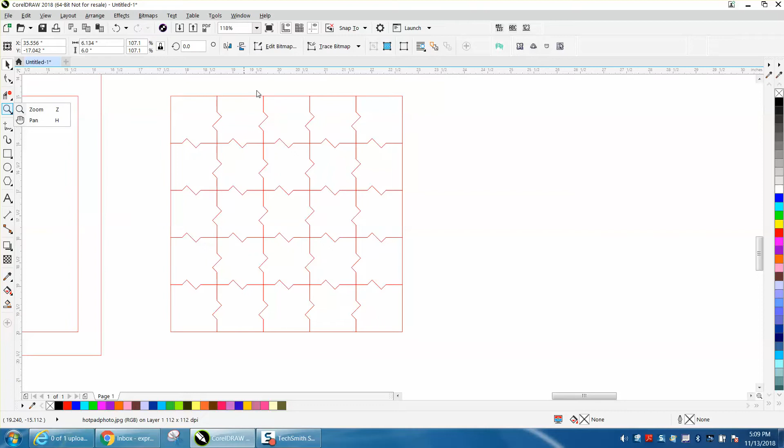Hi, it's me again with CorelDRAW Tips and Tricks, and this is part 2 of making this hot pad. I started thinking it would be really easy to take away the kerf. Whenever you cut anything, these two lines are going to cut out, and the pieces aren't going to fit in as tightly. I have a video on how to get rid of that, and with some glue, but it'd be nice to make the kerf even tighter.

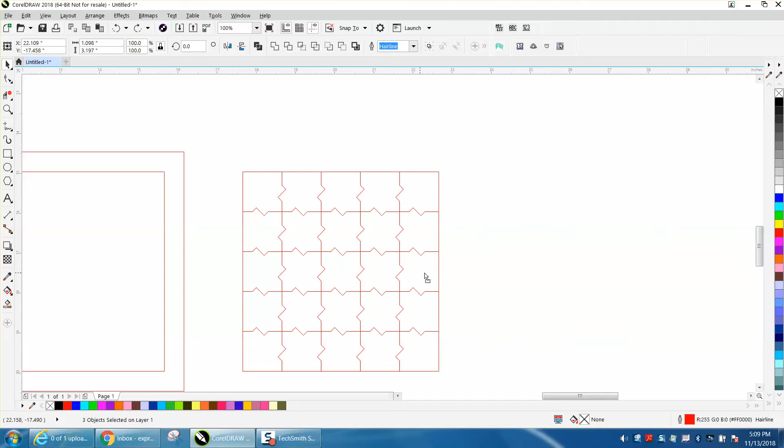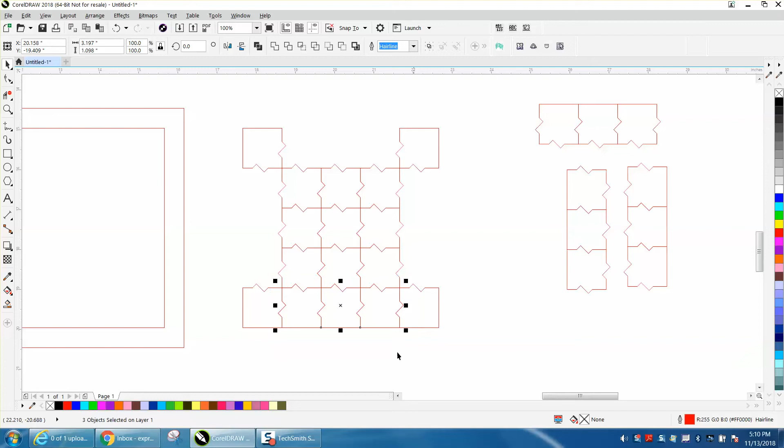And what is neat about this, let me back up here. A lot of these parts are identical. These three parts are identical. These three parts are identical. Matter of fact, I think they're identical. Let's flip them here. And they are a match set. No, they're not. They're a little different. Okay, so those three are the same. So you'd only have to run kerfs on those four, and just to play it safe, I would run the kerf on these four corners.

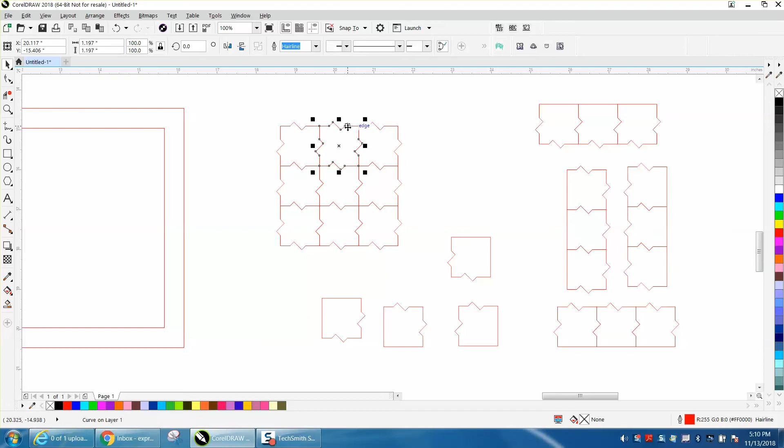And this takes just a little bit of time, and what I should have done, I should have made a copy of this so you'll know they'll fit together. These 9 are all the exact pieces. We proved that in the last video, and just to prove it again, move it over 1 inch. Whoop. Got my nudge factor set on 7. Move this over 1 inch and it fits right on top of that other one. So you would only have to do one of these because these are equal. You could do one of these, your 4 corners, and one of these.

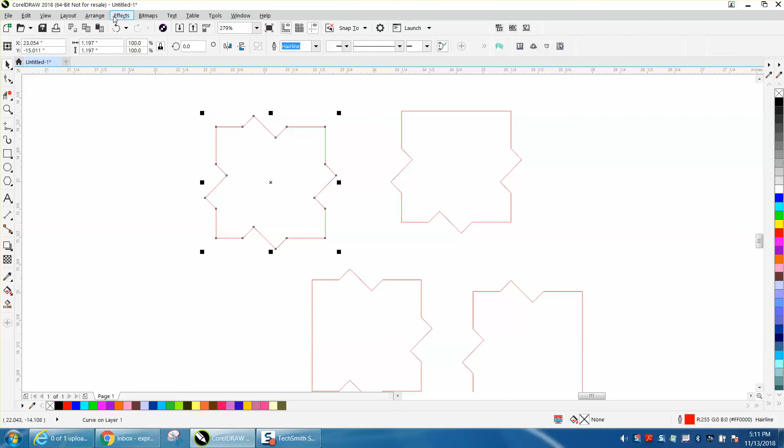So really and truly, you'd only have to run kerfs on these pieces. So that doesn't really take that much time. So you got your 4 corners, and then you got your interior parts. And to run a kerf, to make them fit tight, it's also going to help with this crack too, because you're going to kerf them equally out. This takes just a little bit of time, but if you cut out the first one and it's too loose, you'll appreciate this. Change your contour to 0.003, I found works the best, to the outside, and hit apply. That contoured it just a minute little amount.

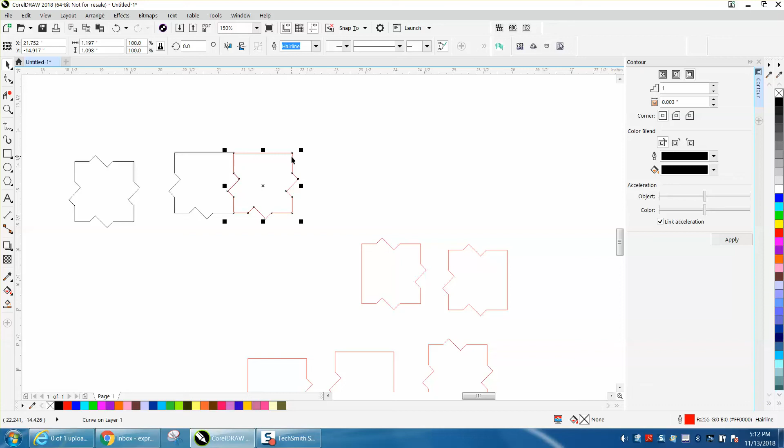Then you would go to Arrange, Break Contour Apart, try to grab the black one and move it out of the way 1 inch. That one is done. I would delete this so you won't get confused. Do the same thing on that and hit apply. Break contour apart. You can do it this quick. And see, I grabbed the red one. So you need to make sure you grab the black one, because the black is your contour. Let me do one more. See, right here is your pen tool, and that's determining your kerf line, your contour line. Go up to Arrange, Break Contour Apart, and try to just grab the black one.

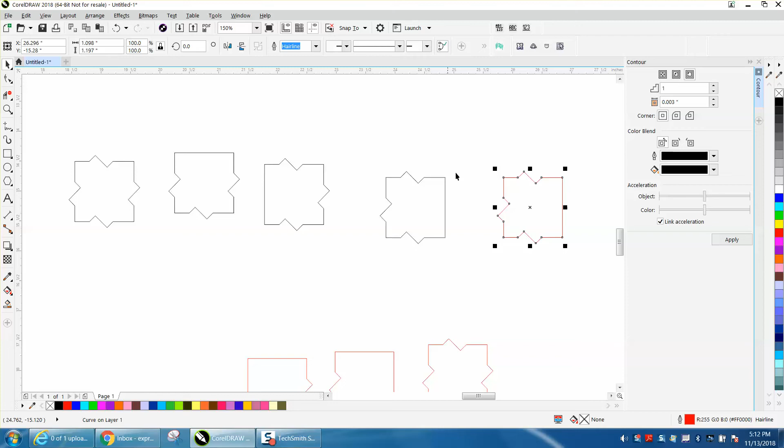And a lot of times it's almost easier to grab the red. We'll do it one more time, and here's a little insight. Let's contour it, break it apart. And if you just select the middle, you selected the red because it's inside that other one. And then do that for these other pieces. And that's why I said I should have made a duplicate of the drawing before I started, so you'll know where these go. This is definitely an inside. This is an inside top. This is an inside left. And see, because I didn't rotate them, this is inside to this way, so they will fit together. This is an inside bottom. So there's your 4 major players, and then your outside dimensions. So don't rotate them, and then you just need to remember how many you made.

Well, let's just do that. We need 3 of these, Control D. Because there's those. Going to fit together like a glove. You need 3 of these. I didn't make a duplicate. So then you need 3 of those, and they're going to all fit together. Well, let's just put these two sides together. And this is a little inside here. Let's just do this right quick. Get them close so we can zoom in.

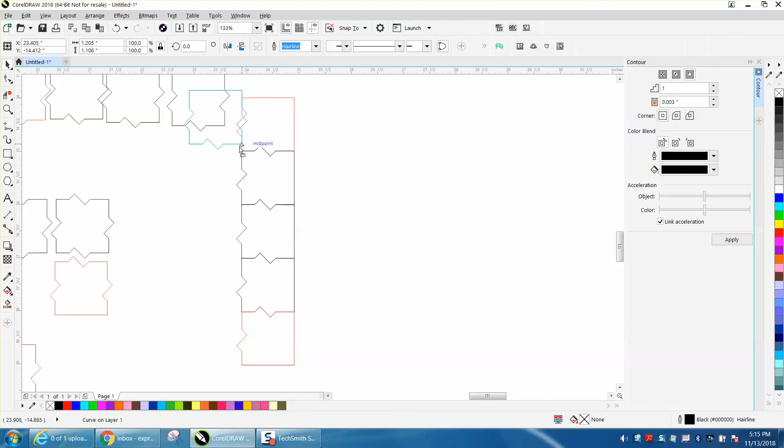And just to know you've got them right, if you grab with the pick tool, grab that node right there, and it should snap right to that. Because under View, I've got Snap To Objects on. Let's go up here, zoom in. And you don't ever have to put these pieces back together because you're going to cut them out separately. And then just grab that node. Sometimes Corel does that with the shape tool if you do it like that. But grab that corner node and it's going to snap to it. You could grab any of them. We could grab that corner node and have it snap to that corner. It's a little tricky sometimes.

Well, let me go ahead and do them real quick. Sometimes it's easier to grab that sharp corner because it's going to definitely snap to it. So there's your outside of your box, and then this would be your middle. You need 9. You need 2 more of that, 2 more of this. And see, these have not been contoured, so you need to think about that. And by contouring them all, let's see if we can see the difference. See the difference right here? This black one has been contoured. The red one has not.

So it's going to actually fit into your, I call it a well. This is your recess. It'll fit in there tight. At 0.003 it ought to fit perfectly. And you would glue all this down, and sometimes you actually have to snap them into place because the contour has taken up the kerf and made it perfect. Anyway, hope that helped a little bit.